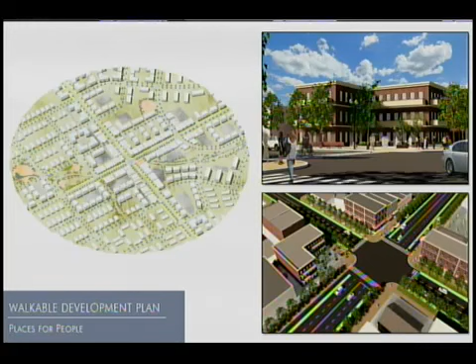This project isn't about mandating that every place in your community be built this way, but allowing this walkable, compact development pattern to be built where the market supports it and where it's appropriate. The walkable development plan, our second piece produced, starts to lay out the critical elements of what it takes to create those places.

Toward the end of the plan, it actually identifies how you go about putting those pieces together to create those places. What we want to talk about today is how you follow up those recommendations with changes to your zoning code that helps create those places.

Our approach is not that these things are mandated, but you may want to look at different areas of the community where you want to say this is where these things should happen, versus other locations you may not think are appropriate. That's something you, with city staff and others, will need to decide. What we want to show you today are ideas for how you can change your zoning code to allow these places to happen.

And then finally, supporting private development: how can we strategically approach our public investments to support private development and create walkable places where appropriate, and really build lasting value in your community through the implementation and construction of these different places.

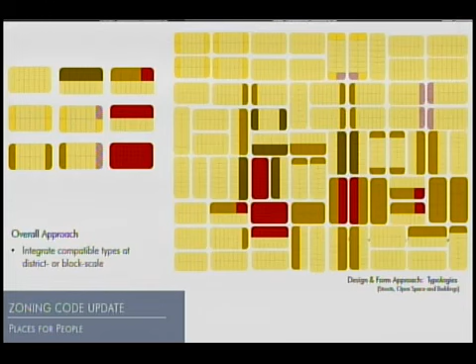The plan starts to identify different types of places where different typologies might be available - a regional scale center with much larger scale buildings and more intense uses, a neighborhood hub at very small scale with fewer different things. So it's expanding your palette of which typologies are available based on which of these place types you're in.

And they're all identified in the walkable development book. So those are kind of our marching orders when we analyze your zoning code to see how well it will implement these or not.

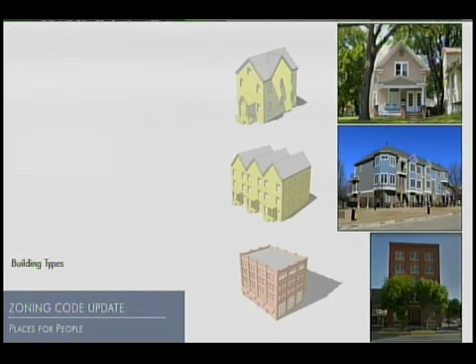These are some of the types that are identified in the book. Again, it ranges from your current detached house all the way up to large-scale mixed-use buildings and everything in between.

And then this is a concept where we think for walkability in particular, this is one of the areas where we want to focus our standards on what matters most. From our perspective, it's how do buildings and sites meet the street? How do we balance car space versus people space? That's the tricky part - a lot of our standards aren't geared towards that in the current code right now.

We would like to refocus them to those, because if you do these things right, you can make a lot of other things happen without necessarily regulating for it. So that's our approach to frontage types, and I'll go through that a little bit more in detail as we go through as well.

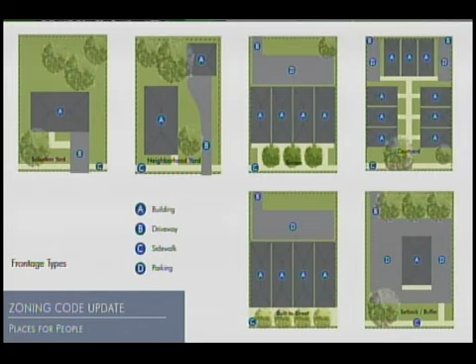So this is an example of what the conventional approach does and why we think this is one of the things we want to address in the zoning recommendations. You find your zoning district, you have a minimum lot size, and then you have building setbacks and height standards that basically determine what you can build. And what happens under those approaches is it's a minimum size, so the bigger the better, the more internal flexibility you have, and the bigger often the larger the setbacks are. So you get into a scenario where development is actually encouraged to orient inward and remove itself from the community and public realm under the theory that we're trying to minimize the impacts of development.

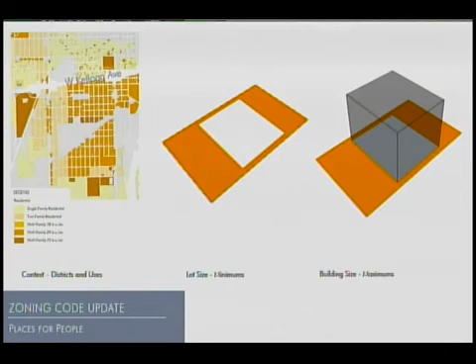Whereas in a walkable standard, we want to actually flip it. The smaller scale, the better. The better it relates to the streetscape and public realm, the better off we'll be. So it's really flipping that internal orientation and larger scale into external orientation and smaller scale. That's the trick we're trying to balance here.

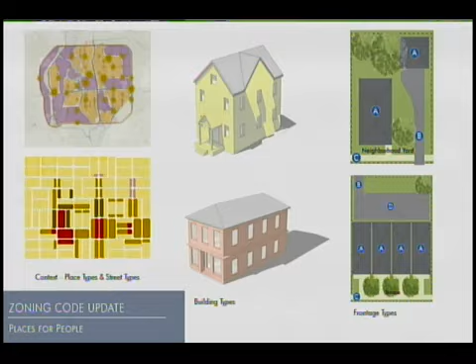Whereas in a typology-based approach, we would try to find where are the locations where we want to do exactly the opposite. Where are the locations where we want to have many different small-scale things going on, and draw them closer to the street so that things like this can happen. These are buildings that currently wouldn't meet any of your zoning standards except for the CBD area, which has no setbacks and standards with it.

So that's an overall quick view of our approach to how we looked at your zoning code.

That approach can be summed up by: we view compatibility as based more on the building scale and form than on the uses themselves. And we view that design should focus on frontages relating projects to the public realm. And we view that the places you're trying to create are going to come from as many different things in a concentrated area as possible, so that you're connecting those trip origins and destinations.

I'm going to now walk through some of the tables of where we've spotted perhaps some impediments in your current regulations that we would want to look at removing and perhaps replacing with different standards.

So I'm going to focus first on the residential part of this. We view that as a huge part of it. As Mary mentioned, one of the goals is to have as many different housing opportunities and options as you can. Then the idea is figuring out where they fit into our overall landscape of the ECA. These investments are going to drive the market for walkable centers, walkable commercial areas. Building that housing stock is a key first step.

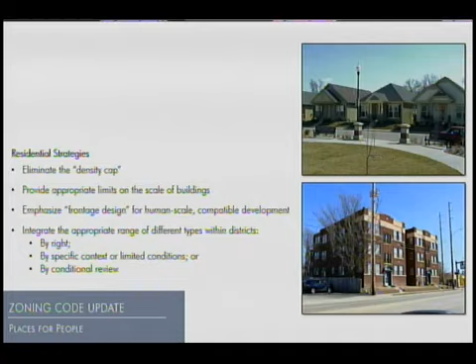So to get there, we really have three main recommendations that I'll cover in more detail. Eliminate the density cap. In other words, we feel all of your zoning districts are based on a density number, which doesn't tell us a whole lot about how the development's going to occur. You have the zoning districts we looked at from a residential standpoint: primarily your SF5, which is a single family 5,000 square foot lot, TF3 duplexes, and then the three multifamily districts: MF18 at 18 units per acre, MF29 at 29 units per acre, and then the B district, which goes up to 75 units per acre.

A lot of the building types we looked at in the walkable development plan, and you have some existing ones in your community that we've documented, are very small scale, a 3-story building with 6 units on a 5,000 square foot lot. The density number on that building type is anywhere from 40 to 80 units per acre. Even though it's a very small scale, good contributor to the neighborhood, when you do the math on that density, it doesn't fit into any of those districts, or at the very least, it would have to be rezoned to the B district to comply. Well, the B district brings along all of these large scale development standards. So there's our disjoint on the density cap.

So we're removing that. In exchange, we do think the limits should be flipped to ensure that we have more smaller scale buildings. So put appropriate limits on the scale of the buildings themselves so that we get more of the small scale projects that contribute to these vibrant places.

So if you're looking at the tables on pages 4 and 5, that's being done with a maximum lot width. One thing to point out—I'll get to it in a minute when we walk through the tables here.

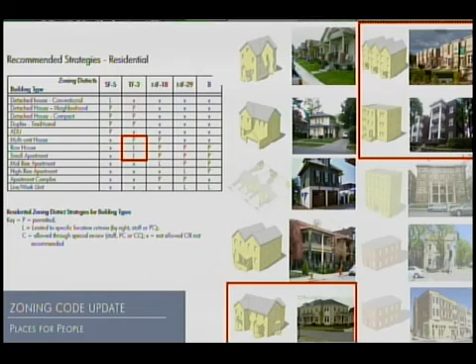Then looking at the next building types up, this is where the density cap really kicks in, and I think it drives things that you probably don't want in your ECA area, especially areas that are going to be ripe for walkable development.

What these standards tend to do is make projects more viable the larger your parcel is—some would even be more viable if you assembled 2 or 3 blocks of your current development pattern, because the development community is trying to get to a unit count. In other words, if I want to build 200 units, I do my math on either 18 units per acre or 29 units per acre, and that tells me how large my parcel size needs to be.

And it's going to be quite large to get those 200 units in, whereas some of these building types could fit those units in a much smaller and compact format. So we are simply ratcheting up the next scale up with the small apartment, mid-rise apartment, and the high-rise apartment.

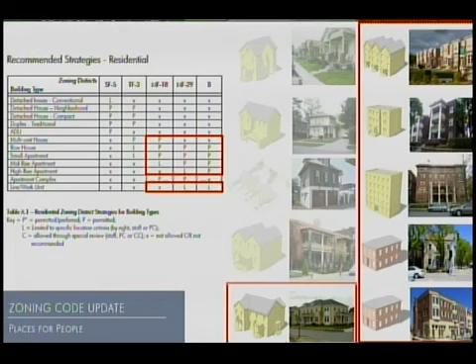Again, these are things that the standards are based off of your current regulations already. What we're doing is removing that density cap and requiring them to relate well to the public streetscape frontage.

One of the other elements that's in the walkable development book and also in our zoning recommendations is this idea of, okay, maybe we don't want to allow these in every situation in all of our existing zoning districts. We can start to take some clues on where they would go. So perhaps some location criteria, when we look at some of these areas that are more walkable and have a mix of housing, there's really a distinct pattern on where the next increment of building goes.

So if you consider the upper left might be a predominantly single family block, perhaps just the corner lots are okay for a duplex or a multi-unit house. The next one over with the twos on it, that's showing some in-grain lots where they're carved up to be much smaller, either for smaller detached houses or oftentimes you'll see row houses aligned along a lot like that. And then we keep graduating up to, well, maybe it's a busy corridor and therefore it's appropriate there, or it's a transition block to our walkable centers or public open space, and those are appropriate for these locations. So those are some additional things that can help you filter where, how, and why we would want to allow these additional building types.

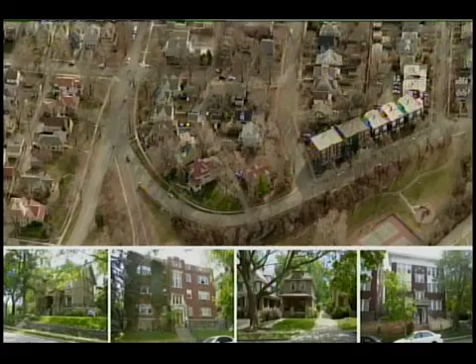And this is just a representative example of a community that reflects all of that. There's a lot of different housing types within a small area, and they're all kind of existing there for a reason. There's everything from small lot houses to large lot houses to row houses to small apartments in this picture, but they all exhibit a similar scale and character, and there's a distinct pattern to where and how you place these building types. And so that's the idea behind getting more housing options in a neighborhood.

Feel free to stop in with any questions you might have as well in the middle. I'm going to move on to the non-residential component now.

Overall, so this is a summary of our recommendations for the mixed use and commercial part. So those nodes, destinations that people want to walk to.

Really the only impediment we find in your zoning code, and this is looking at everything with the exception of your CBD zoning district, that central business district, all of them require I believe it's a 20-foot setback, either 20 or 25. I'm getting the residential and commercial confused, but a 20-foot setback. So there's the biggest impediment, because we know a lot of these buildings address the street, and you have lots of them throughout your community, so you all already know that.

However, they're finding a different path to that, either through overlay districts or through the creation of multiple planned districts that are difficult to administer, but somehow getting exceptions. And so our thought is we just need to make that an allowed building type, a building that relates well to the public streetscape, particularly in the ECA, which is an established urban pattern.

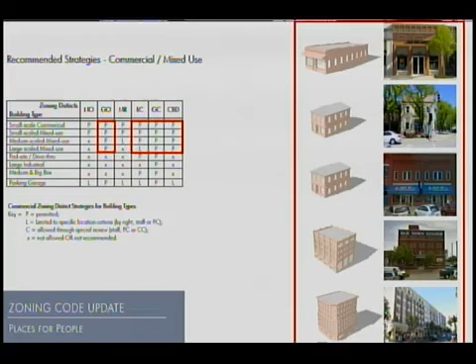That gets us up to the small scale mixed use and small scale commercial buildings. The next increment up are these larger mixed use buildings, and again we saw evidence of some of these being built in your community. How can we create an easier path for those? Our thought is they really ought to be allowed in all of the other commercial zoning districts, limited commercial, general commercial, and obviously they currently are in your CBD. The difference would be putting some specific frontage type and frontage design standards on them to be built to the street.

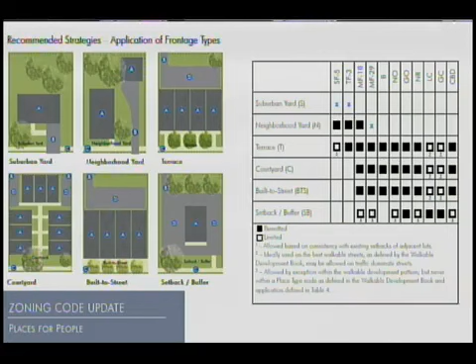I wanted to hit a little bit on continuing through the zoning memo, the application of frontage types. This is where we think the design standards need to focus. They don't need to be overbearing. It's simply suggesting that we need a better balance of car-oriented parts of our access and design for our sites versus people-oriented design, and how do we do that.

The walkable development book suggests that, particularly on the residential side, it's pretty easy. We can tie frontage types to which districts allow a type as permitted, and where we allow it as limited. The neighborhood frontage type and the terrace frontage type are what we're suggesting for these ECA neighborhoods. All that's doing is limiting the extent that's driveway and garage, and in some cases with this terrace idea, letting you bump up even closer to the setback than you currently are. We've seen evidence of this already occurring in your community, so we're simply trying to codify it and be more strategic with it.

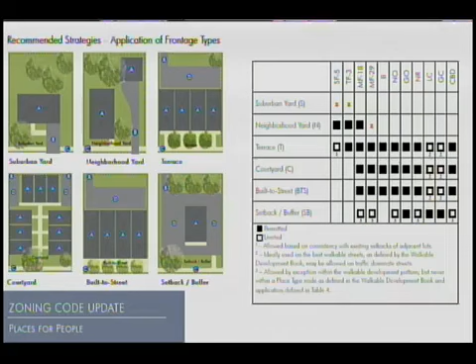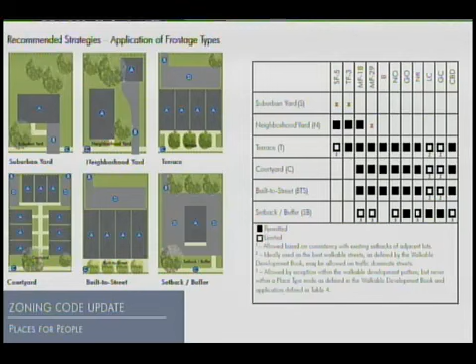As we move over to the commercial types, this one is more geared towards your streets and the context. So where is it appropriate to build to the street? Where do we want to require it? Where would we want to simply allow it as an option, or where would we prohibit it?

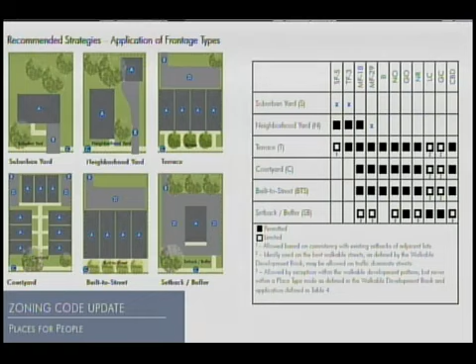I think Ciara is going to talk a bit more about the strategic investment side of this and investing in public streets, but there seems to be a logical connection: as some of these streets are repurposed to more walkable patterns, that's a good opportunity to kick in either a strong suggestion or a requirement that future investment should build to reinforce those public investments in walkable streets.

Clarify the difference between the terrace example and the built-to-street example.

Sure. These are concepts to work with, but the terrace example we're using primarily as a residential type, although you do see commercial uses use it. Basically it's anything that's set back 10 to 20 feet, but that space is not used for car access, it's more social space. You do see it somewhat in commercial areas, perhaps as an outdoor dining area, or in areas with grade where the sidewalk can't front the buildings, so you build a terrace instead.

In the residential setting, it's often used for townhomes, a series of townhomes that have a 10 to 20 foot setback from the streetscape. Whereas the street front one is literally that, something built as close or very close to the street, and the public sidewalk becomes the social space for that building type.

Is that similar to, with state laws now prohibiting smoking inside for restaurants and bars, they're building these little terraces outside, fenced in for the restaurants and stuff? Does that play within that whole terrace style?

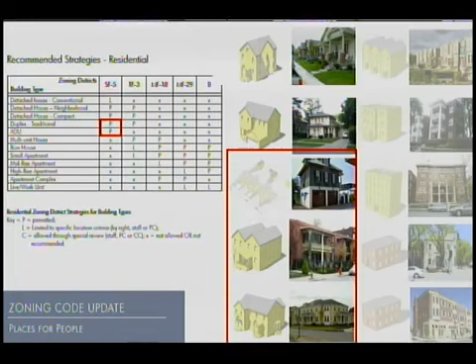So by making it a P, it's permitted, or making it an L, it's limited, but we've listed where it's limited to based on these criteria. Technically, then they would not have to go through a long public process to get that built. It would be more administrative, or perhaps just a planning commission review without a public hearing, to make sure those conditions are met. So there's a way of streamlining it.

Now, obviously, to make that change, all of that has to go through the public hearing process to get those standards into your code. But if they're built into your code, technically those projects can start to happen a lot easier. Whereas right now, on a few of those districts, it's all a public hearing and a discretionary process, and it's a lot longer.

More questions, if you'll indulge me. You'd mentioned pages 4 and 5, and I'm looking at a footnote here on one of the tables, and it says disregard front setback standards. The frontage type now regulates the setback as well as other design features. Can you explain that one a little bit more?

Yes, so the table again, trying to stay as true to your current standards as possible. The table for front setback lists what's currently there. So for example, if you look at the detached house up through the duplex, what we're saying is in walkable neighborhoods, we aren't saying it's a minimum setback of 25 feet. We'd be saying it's a setback of 10 feet to 50 feet.

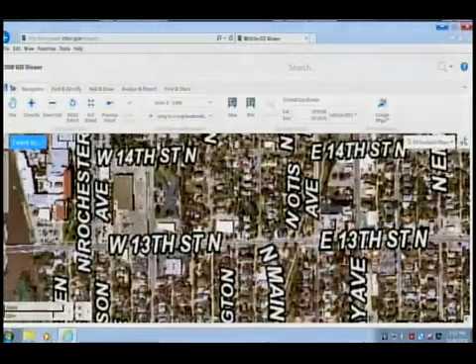Yeah, he's got the location right. Pan too far left. There you go, that's to your right. And it's further south. Central and Hillside, Central and Hillside, Wesley Hospital, yeah. We're getting closer, on the hillside.

So how do you? My initial response is that's what they're allowed to build - the path of least resistance. Well, I understand, but how do we encourage a walkable development here? Because of all the places I can think of which have enough demand to have a walkable development, this would be it. Here's a permanent set of employees that are captured, as best as any place in town, and yet there's nothing walkable around this thing, except for a walkway between two buildings that goes from the hospital to an office building. So have other cities overcome this? How do you say to a Walgreens, put the parking in the back, or you can't go here?

Your pedestrian space is immediately adjacent to your travel lanes. There's no buffer, there's no separation. I won't go too dramatic on you guys, but it is an inhospitable environment for people to walk. So people aren't going to walk.

I would venture to guess though, there's probably quite a few people that walk from the hospital to Jimmy John's and dodge traffic, play Frogger across the street to get to those places. I think the first thing to do - and Sierra will talk about it here in a minute - is we need to change the public realm to a more hospitable environment for people to use outside of a 4,000-pound appendage they have to carry around with them called the automobile.

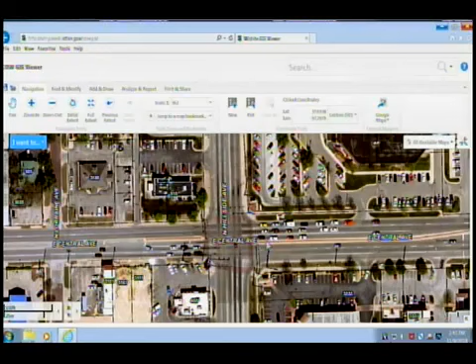So that's idea number one, what we've seen in a lot of places. If you're familiar with KU Med in Kansas City, Kansas, immediately across the street from their hospital they've pushed everything to the street. There were outdated pad sites, and they've taken two solid blocks and built it up to 4 or 5 stories.

Part of one block is retail on the first floor, doing pretty good, with a hotel above. The other block is retail on the first floor with some office, maybe medical office, and things like that above, and maybe even some apartments.

The retail's a little slow on the take. It's a similar situation, only 4 lanes, no on-street parking, but it has a wider public realm that makes it more comfortable to walk in. They have a similar captive market of about 8,000 people every day, so it can be done. But I'd argue the first thing that needs to happen is a change in the public realm to encourage people to do that.

The other option is this could be an area ripe for an overlay district that requires them to do that. But if you do that, you need to respond with similar public realm improvements that make that development pattern usable and encouraged.

One of the problems with pedestrians on these large intersections is you push the button, and all it does is tell you when nobody's turning left. You have no protection whatsoever. I see people do this on bicycles all the time—they think they have protection when they push that button. The only way to have protection is to stop traffic from all directions and let people cross.

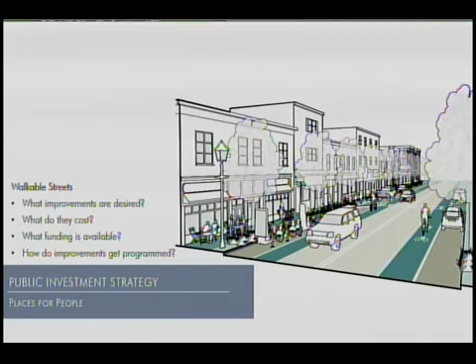In terms of walkable streets, what I'm going to talk about is what improvements are desired, what they cost - that was a question the city had, what typical costs would be for creating these multimodal walkable streets, what funding is available, and from the city side, how we get these improvements programmed.

In great detail in the development book there's a large section on different street types. I'm just going to provide a summary here.

We simplified things - there are some street types in the downtown plan, as well as some street types in the street design guidelines. So we created 6 different street types that reflect the land use context along with the function of the street. For example, Douglas is an arterial, but it changes dramatically in land use character as you go from west of Delano, through Delano, downtown, out to the design district and beyond. It's an arterial, but the land use context changes.

So we came up with 6 different street types, and these relate to the types and levels of investment in walkability. There's the mixed-use Main Street - Douglas is a great example of that. There's a mixed-use connector, think of maybe East Harry, where the land use is some residential, some commercial, even some industrial.

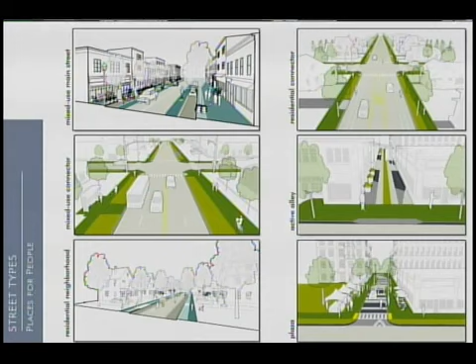There's also a residential neighborhood type. I think about how First and Main, headed south of downtown, are pretty wide arterials, but the land use context is so different down in South Central, where it's more residential than it is downtown. We want different strategies for how that street should function based on the land use character.

There's also residential connectors that are largely residential uses, not as much commercial - so maybe like Oliver, but they still move a lot of traffic. And then also active alley, the gallery alley, and repurposing some of those uses to have some desires for what that would look like.

And then also plaza streets. Plaza streets really refer to the streets of Old Town, where it's a much more narrow, shared space between people walking and biking and traveling.

These street types are a tool that staff can use when working on neighborhood plans, corridor plans, reviewing development proposals to say, hey, these are the characters of the streets we want. So in many ways it's visionary. We're not going to go through this project and label every street with its street type, because that would be very onerous, and you'd want the neighborhood involved too, to help decide what land use character they want and what street type fits.

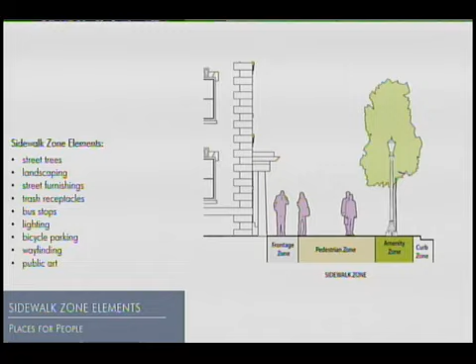Walkability is so much more than just having a sidewalk. A sidewalk is the bare bones of what you need, but there are other things needed to make streets safe and comfortable. I like the analogy that when you're in your car, it provides seating, it provides shade, it might even provide your trash receptacle. But when you're out walking, you need trees for shade, bus shelters for shade, you actually need that trash receptacle and lighting.

So what we did is, for these different street types, identify what sidewalk zone elements are needed.

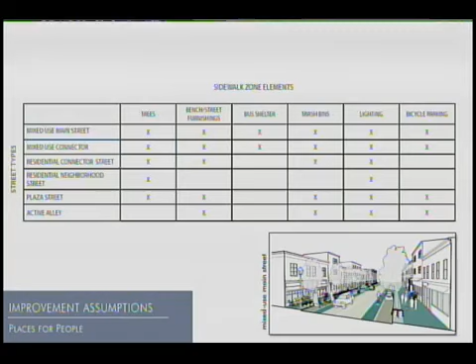Now this is part of the investment tab in your book if you want to follow along, and it's on page 12, because I know these tables are a little small, especially for folks in the back.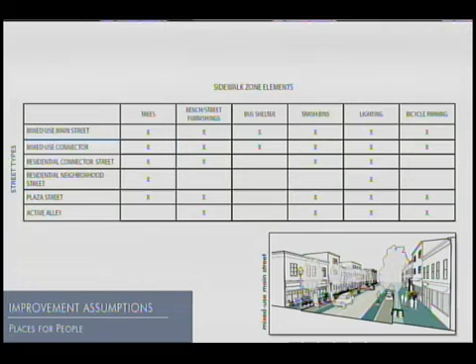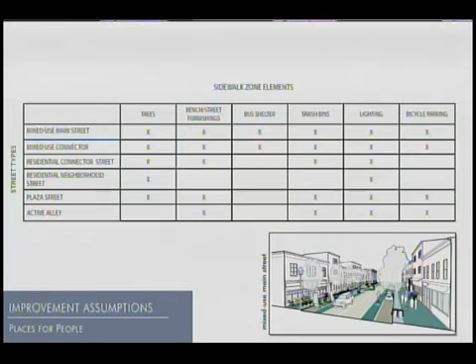So the picture down here is that mixed use main street. Think of Douglas in Delano or other places. That really has all the elements: trees, benches, pedestrian scale lighting. There are some bus shelters, you've got trash bins. You have all those different things for this really walkable place. And that would be the core of those nodes, the circles that we saw on the map that Graham had up.

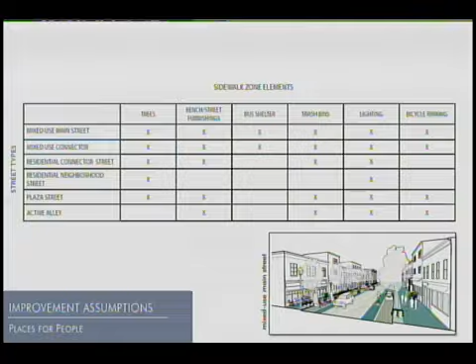As you move to the residential connector streets, you need a little less. You probably don't need special bike parking. You're probably not going to have bus shelters because the transit service isn't as frequent. Then when you go to the residential neighborhood street, these quieter streets, that's really trees and lighting. You're not going to have benches and bus shelters and bike parking there. So it really scales the investment back based on the character of the street.

Plaza streets are on the chart and active alleys as well, but it's just that concept of what's needed for these different street types. And then we use this to build our cost estimates as well.

So one of the questions I thought you might have is how we handle our existing right-of-way. How do we do all of this with the land that we have? Because the established central area has a good street grid pattern, we're not really talking about building new streets, but redeveloping the streets at the same time we're redeveloping the land. The idea is not to have large street reconstruction projects, which are very expensive and take a while to get programmed, but to use the assets we have there and reprogram the space.

So for this example, it could be removing or narrowing motor vehicle lanes, removing maybe parking on one side. What that does is it allows you to move the curb lines in. Imagine that the curb line on this street used to be between these two green shades, similar to Central or Hillside, where the sidewalk used to be right at the back of the curb, which on a rainy day today, you're going to get splashed and all sorts of things.

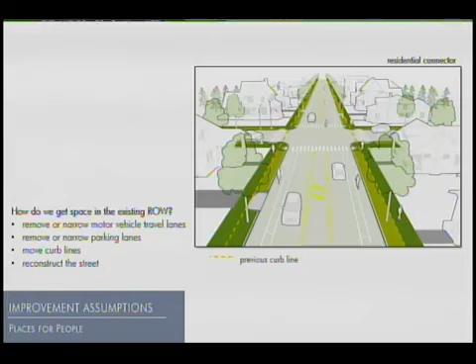There is one street type that does require reconstructing the street, and that would be like if you're doing new streets in Old Town, that is a full reconstruction, turning some dirt roads into brick roads and such. So that is actually one of our most expensive examples.

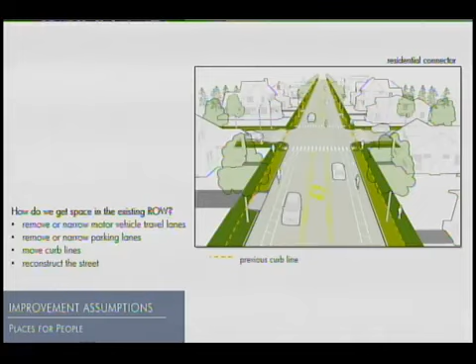So this next chart is on page 11, and taking that example of the residential connector street, what this X in the box says is how are we going to improve this type of street? It really would be adjusting the curb lines, moving them in a little bit to add that space. If there wasn't a sidewalk there—the ECA has a pretty good intact sidewalk network, they're not everywhere—also to add that amenity zone or that buffer zone.

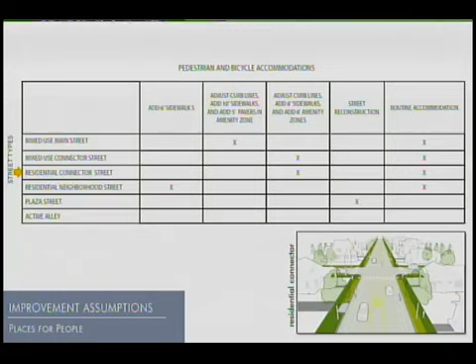And then this table shows the different ways that we would do that for the other streets. But again, it's really reallocating the existing space that is out there.

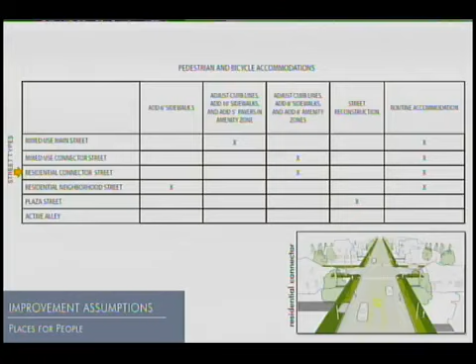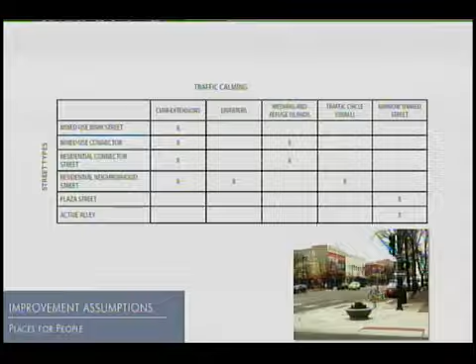The next chart is on page 12. So in addition to that, something that's very important for creating walkable development and walkable streets is traffic calming—slowing the cars down so that it's more comfortable. I think about sitting outside by a fast-moving street with high speeds and cars whizzing by. It's noisy, it's not enjoyable, it's not a place you want to be.

But if the streets are a bit more calmed and people are maybe actually going just the posted speed limit, that would make things a lot better.

I'll admit when I come to Wichita, I try not to rent a car because I walk the talk, but I rented a car this time because I had to go to a lot of meetings. And so I'm driving along, the person who tells you speed is bad, and all of a sudden I was going 40 in a 30-mile-an-hour zone. I thought, oh my goodness, this is horrible. But it's just that the street is so wide and everybody else is going fast. It's just designed to go quickly.

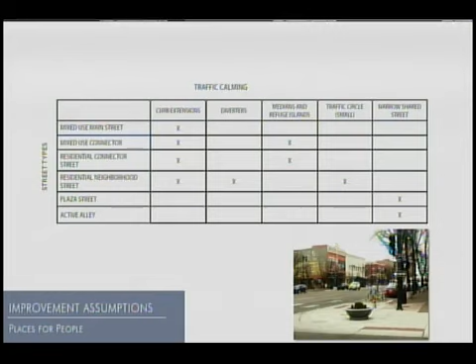So there are traffic calming techniques. One of them has been implemented on Douglas with the curb extensions, which is the photograph on the screen here. What's important for Wichita too is to pilot things before you put the concrete down. So the flexible posts went out first, we tested it out, whoever decided it was a good idea put them in, and that's a huge improvement for the walkability along Douglas. There's a shorter crossing distance to get across, and as a pedestrian you are so much more visible because you're out there where you used to be back behind the parking lane. So that's just one example of how you can test some of these ideas before they go in.

Another one too is refuge islands. So if there is this 5-6 lane road, provide a space halfway in there that if you get stranded, you have a comfortable space to wait. You have a push button as an escape to get across. And also just having a median kind of causes that friction that helps slow down some of those speeds.

So again, this is a table that helps us with our cost estimates as well. This next table is a doozy, it's on page 13. But what this lists is all of the estimates or the assumptions that went into the cost estimate. So how frequent would the lighting be? How frequent is the spacing of the trees and trash receptacles and such? And so all of those details are there so you can check our math and see what we included as assumptions for the cost estimates.

So what we did is create the cost estimates based on a block versus a mile, because we see these being pretty, ideally smaller scale projects. And so if we're talking Central and Hillside, you're probably not going to change the street for miles and miles, but you're going to work on a couple of blocks. And you might decide that maybe the more walkable part should be sort of on the east side of Hillside, where Panera is and the hospital is.

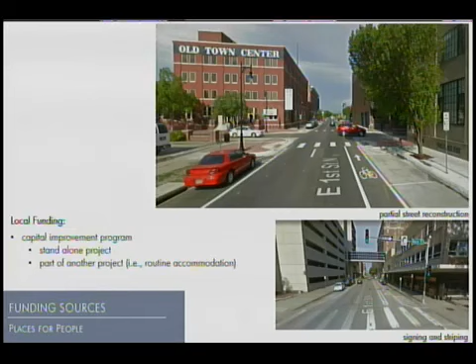Another option, kind of similar to the temporary curb extensions on Douglas, was the bike lanes we see downtown on Main and First and Second. Those were done by just repurposing or reallocating space in the existing street to make way for bike lanes, which is a cheaper way of doing things. It doesn't come without cost — there's still process, paint, and restriping needed. But it's a good example of how you can do some of these things without huge capital investments.

So with that, I'll turn it over to Graham.

I have a question for you. Yeah, so back on your street types where you have low estimate and high estimate, I think you might want to add in maintenance — like a 5 to 10 year maintenance — because I've seen, and the city's doing a great job with this, using the mixed use of brick and concrete. But we've seen in the last 5 years, they're doing the same thing in our area. Now we have checkerboard crosswalks, because instead of replacing the bricks when flooding or cracking happens, they just put black tar in it. So now we have checkerboard.

So that's why I'm seeing that. And then also when they come in and redesign and put these trees in, if there's no water in there, or businesses aren't watering them, then the trees die out within probably 1 to 2 years.

Right, same thing with the flowers and the planters. So maintenance for the next 5 years, you have to think about that also. Right, yeah, because we didn't include maintenance costs. We mentioned that, but that is definitely a cost to the city for maintaining paint and flowers and lights and such.

I've got a question on traffic, what do you think about one-way streets and safety for pedestrians? One-way streets tend to be a little faster because you don't have the friction of two-way traffic. Another thing, depending on the number of lanes, is that especially at a mid-block crossing without stoplights or stop signs, we call it the multiple threat situation, where the first car has stopped for you, but the second and third car have no idea why this person has stopped in the middle of the street, and they could zing by and can't see you. So those are a couple of things that come to mind with one-way streets.